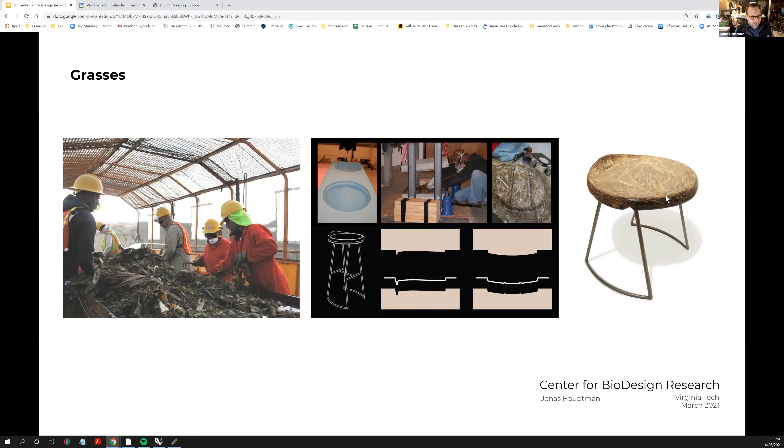I forget the year now, but I was researching palm foliage in the LA waste system, and I developed this stool. And when I started teaching at Virginia Tech, I came back to this project, which I've done with many of my interests, whether it's folding or computation or materiality throughout my career. And I thought, I should think more about grasses. And so that led me back to grasses and then to bamboo.

And so what I came to learn about bamboo, which I find quite important and quite fascinating, is that bamboo is largely an agricultural product. It's not to say that it doesn't grow in the wild in a forest, but when it's used as an industrial material, it should absolutely be farmed, and it commonly is farmed. And so that gives us a unique position to have a forest product that actually can be farmed in a responsible way.

Part of what makes it so easy to be responsible is it uses not a whole lot of water, doesn't need lots of pesticides, and also it's rhizomatic, meaning that it generates new growth from the same root structure. If you clip 1/3 of the poles every year after the grove is reasonably mature, it continues to regenerate, and most species will regenerate for 60 to 100 years. This is a really unique part about this plant that's not true about trees.

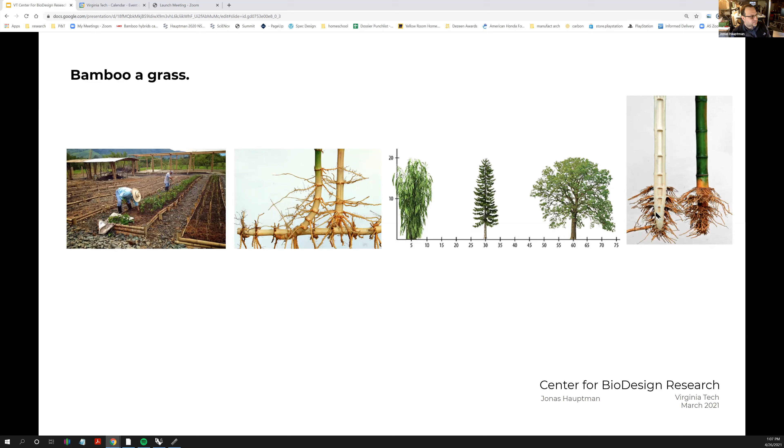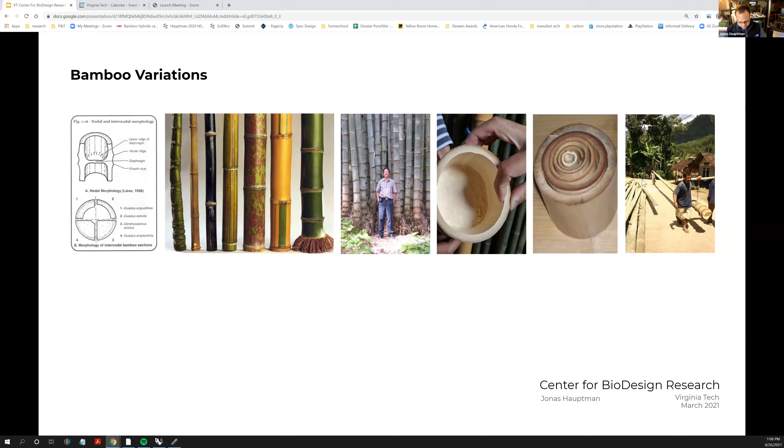So although I teach mostly industrial design, my interest is, I think, pretty squarely positioned between architecture and industrial design. And I think in the areas of biomaterials, often industrial design, which has less constraints, is a pretty fertile ground to look for early folks developing interesting ideas.

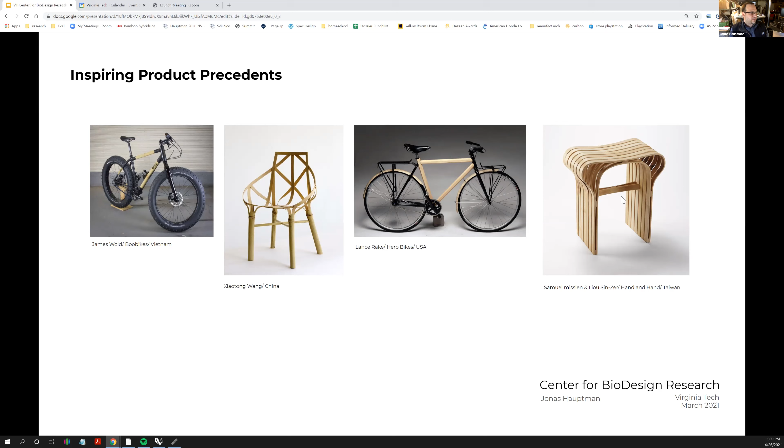Or Lance Rake's ingenious ways to take craft histories of things like barrel making and incorporate bamboo as a material system. Or this collaboration between an artisan and a designer using the kinds of processes used in making things like baskets that you might boil a dumpling in. So I think in design, there's been a really interesting use of bamboo already. Of course, there's always room for more.

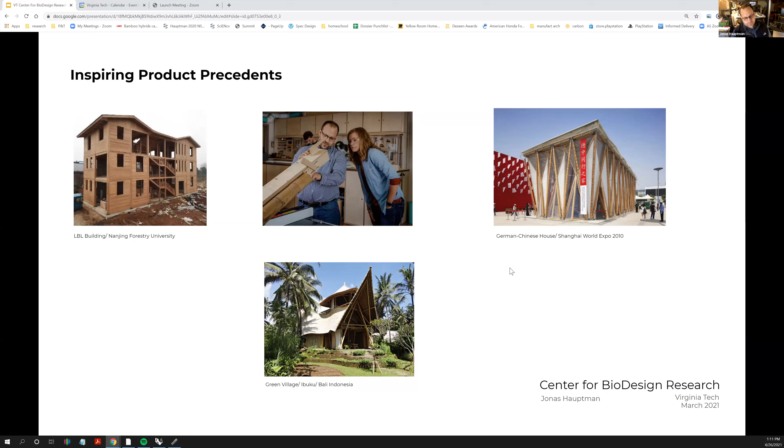So it's also important with bamboo to know that largely, unlike lumber products and other forest products, it's still worked in a way that's almost pre-industrial revolution. So often the carpenter is the farmer. The carpenter goes to the field, might care for the poles, but certainly is the one selecting and picking the poles and curing them and drying them and so on. And so because we're in Virginia, not in Vietnam, we didn't do any of those steps, but we sort of paid a penance for that.

And so I wanted to describe our process, which is I went to Vietnam. I met with James Wold. I learned quite a bit about this species called Dendrocalamus strictus, and observed his process. So they select poles, they heat them over a fire to straighten them because they grow bent when they're a clumping species like the one we're speaking about. Then they're soaked in a tank of boric acid, which is basically detergent, at a high temperature to drive the sugar out of the bamboo for 48 hours.

And then they're dried in the sun, often for a month or more, depending on whether it's the rainy season or not. And then in our case, they packed them into a container. That was wonderful. We wound up with this huge lot of bamboo to experiment with, but it came at a certain price too. University labs are not accustomed to container deliveries, for example. Also, I had no idea how much mold could grow in roughly 20 days at sea. Literally, it rains in the container. So it showed up to our lab. We have very strict health requirements in the United States.

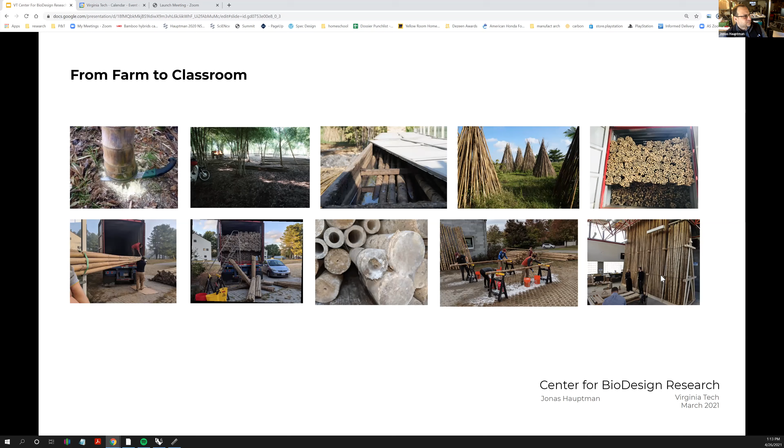But the other important thing is we got to know the bamboo in a new way, touching the material, building tacit knowledge, not just for how to work with it, but literally what it is, what is its form. And then finally, we began to work with it in the lab. You know, bamboo is able to be unitized as a commodity, but it is not unitized like lumber. Every piece is different. So you really can't stack it the same way. You can't describe it with the same precision in a static way.

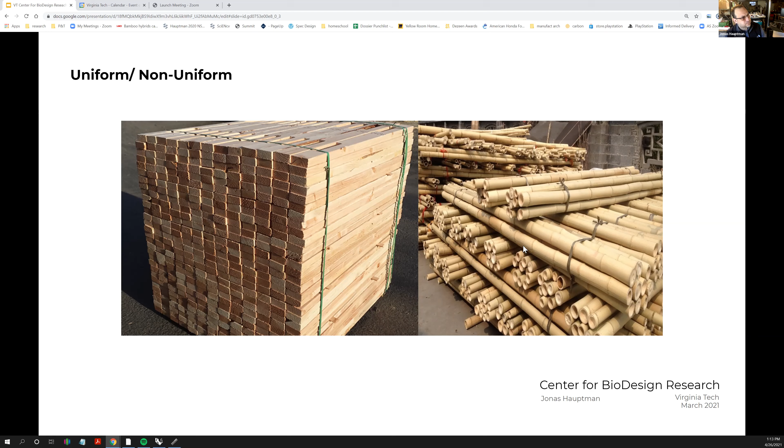So we've started to build some machines to process bamboo, to experiment with the intersection of technology and biology, and to develop machines that would allow someone less skilled as an artisan to work bamboo precisely, and also perhaps tools that might mediate between a designer's intent and a maker's ability.

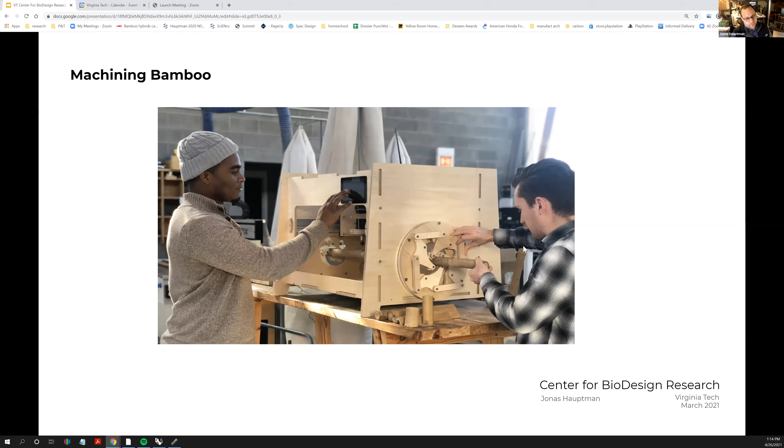And I took this one to Vietnam and tested it to think, oh, maybe it will work to do some kind of manufacturing. It turned out it was a very good conversation piece for James and I to talk about, but it wasn't really quite productive in the way that we might have hoped. And that led us to kind of continue thinking about what to do next.

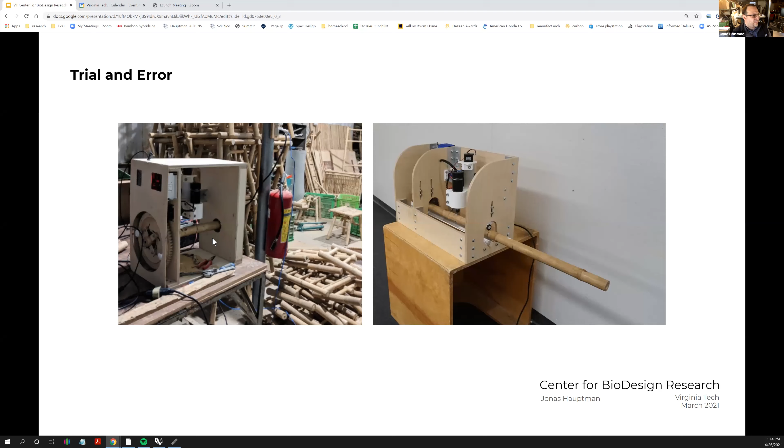And so a couple of years later now, we finally have a modestly working machine, still could use lots of improvements. And the goal is to develop an open source project that we would share the designs with freely around the world, and that can be produced with simple tools and basic computer skills for under $1,000. And so I think that will be ready to release within a few more months. And it builds upon the work of many others, not so much with bamboo, but the DIY community that's been building machines largely in the last 10 years, but in some ways for the last 25 years.

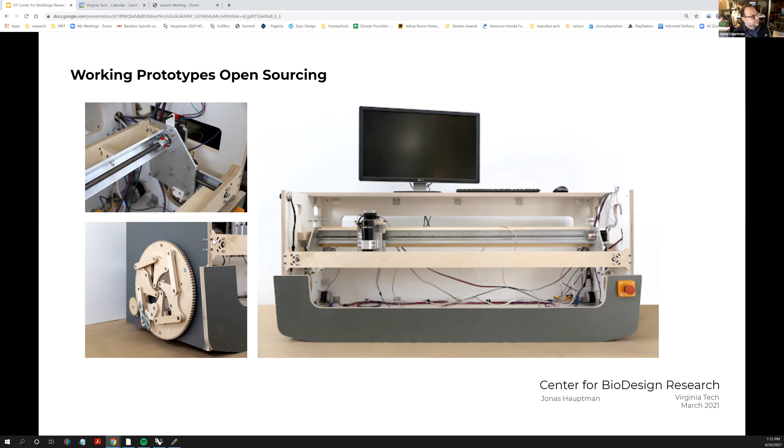So the whole reason we would do this is we're trying to rethink the way you think about materials. So, you know, historically, we thought about standard materials in the last 25 years that were flat rectangles. How could you reprocess a flat rectangle to build a new kind of product or a new kind of architecture that had more expression and still had an economy of production? So these new materials, they require a different kind of thinking.

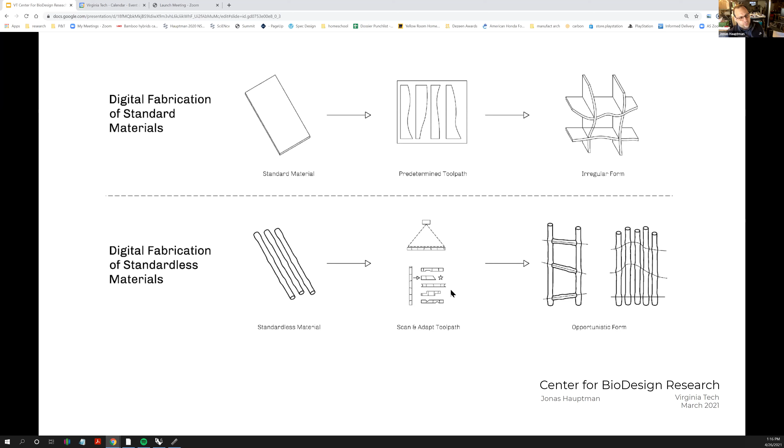And so perhaps you have to be more collaborative with the material, but also to know it, we've been developing methods to scan it, to actually build models of every pole. So we want to know each piece in a precise way in order to use it to its fullest potential. We've also been playing around with some other ideas.

And we've also recently learned that what we thought was called Dendrocalamus strictus, iron bamboo, may in fact be Thyrsostachys siamensis. And so these species can be misidentified. It's another challenge for bamboo, that to grade it and identify it is quite hard. And actually the person who sold us the material, James Wolfe, is considered a world expert, and he's actually not sure which species it is now.

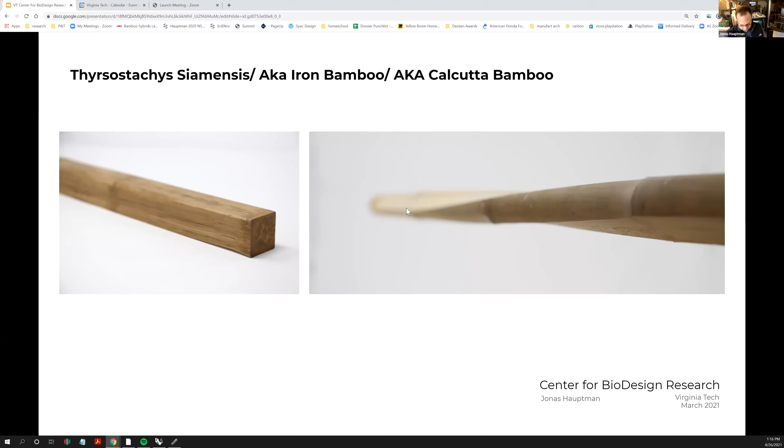So this project, we largely are trying to rethink the way the vernacular of bamboo works. Can you see it as a woody, solid thing, not as a hollow tube? Can you avoid what we would call the Gilligan's Island kind of tiki vernacular that it's so often associated with? Not an indigenous hut, but a kind of a contemporary building system.

And to do that, we thought, how could we begin to make some planarity out of these things, turn them more into rectangles than organic shapes? And how would that affect its performance? And so, looking at the histories of wood and of bamboo, wood is commonly turned into boards, but it's big enough that you just lose the whole outside. It doesn't really matter. It's sort of reasonable to do that.

Or bamboo, often it's used whole or it's flat, but really trying to salvage every bit of its potential just in a flat shape, which largely loses its structural potential. So we thought, what if we could do something in between or something a bit different? And so we worked on developing some methods to turn it into small boards. And so the biggest question we had was, would it still have mechanical benefit? Would it still be reliable and strong?

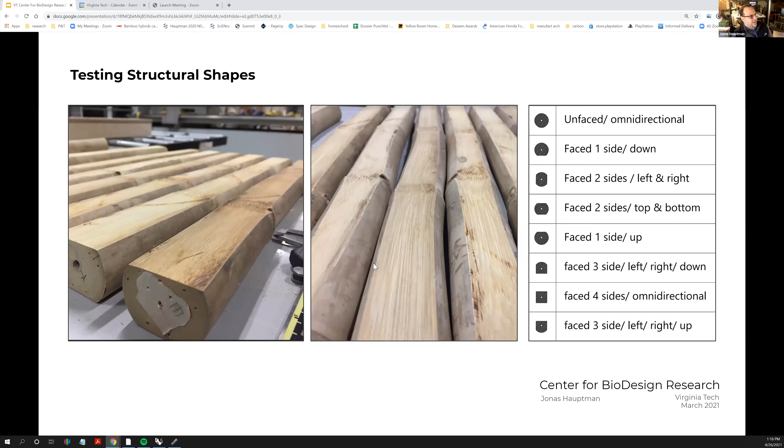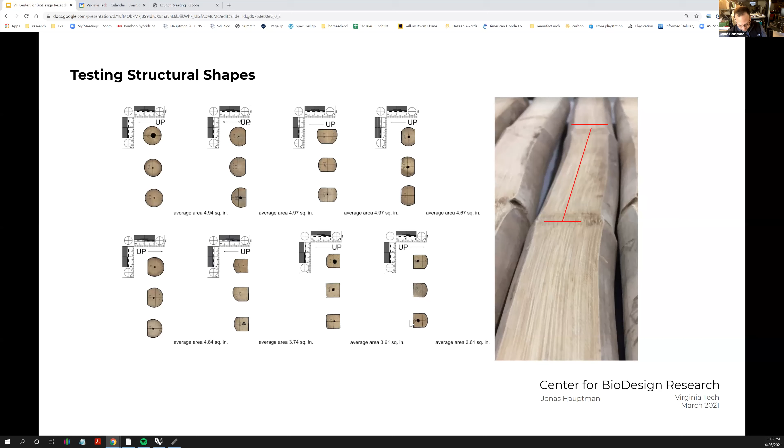And so basically we developed a series of different permutations for shape and for how we might bend pieces. We made a small sample set, 3 of each, not a whole lot. And then we also tried to look at area and figure out where's the biggest area, the smallest area, and can we try to make those as average as possible so that when we break these things, we'll have the most evidence that they're similar. And so we did tension, hardness, and bending testing on this material.

And what turns out is that, in the United States, a 2x4 is a very common building system. It's called spruce SPF2, spruce pine or fir 2 is how you would call a 2x4. And so there's a lot of literature on the common strength of a 2x4 for bending. And so we compared first 2x4s to bamboo poles.

And it turns out that in the round, as well as with one side cut onto it, until you get down to much smaller areas and at least 3 cuts, the bamboo is still stronger than a 2x4 and doesn't lose a whole lot of strength either, as long as the area, the section, the height, and the width stays somewhat constant.

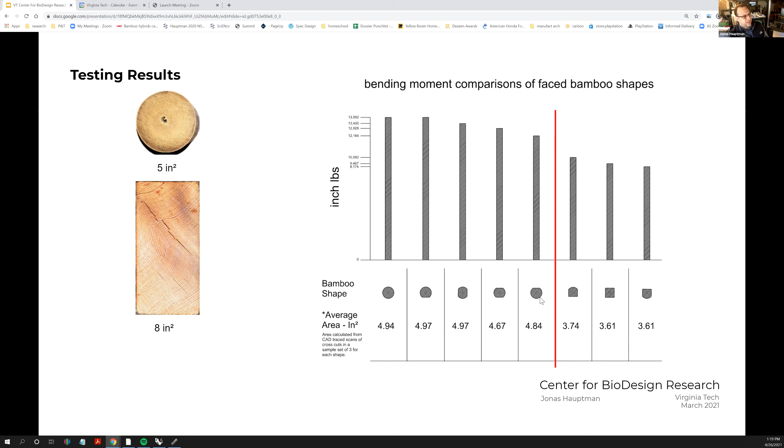And now is a good time if there are any questions, I'll stop for a second. Are there any questions yet? Yes, we have 3 questions here on the Zoom chat, but do you want me to ask them now or at the end? If they seem appropriate, either way is fine. I'm happy to answer 1 or 2 now if it makes sense.

Okay. Well, we have one from a student that says, that elasticity that bamboo has is what architecture tries to mimic with skyscrapers so they can react to earth movements and wind, right? It's true. Yeah, bamboo is incredibly good seismically, and there's some work I'll show towards the end from Colombia that at the scale of 2-story housing, it's been shown to be far better than concrete. And I actually believe there was some work done on a shake table in Guate in collaboration, I think with an El Salvadorian group using this method. I don't know where in Guate it was done, but yes, bamboo seems to have very good properties this way.

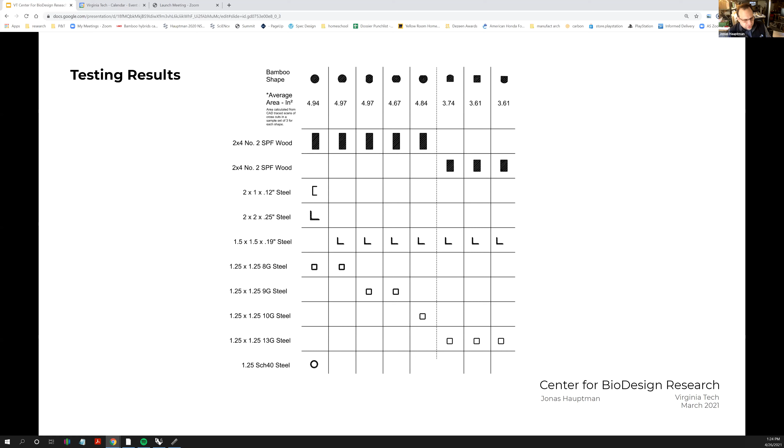So just to show you a little bit more about how this species grows, it's really quite interesting. You think of bamboo as a hollow structure, and of course it is, but this species is quite woody. And so we did a lot of work trying to understand this so that we could develop geometries that would use this characteristic. If we want it to stay woody looking, then we don't want to hit the middle of the pole when we machine it, for example. Other times we might choose to expose that, but then we have to think, where in the pole would we do that? The nodes are always in different places, the wall thicknesses change, and so on.

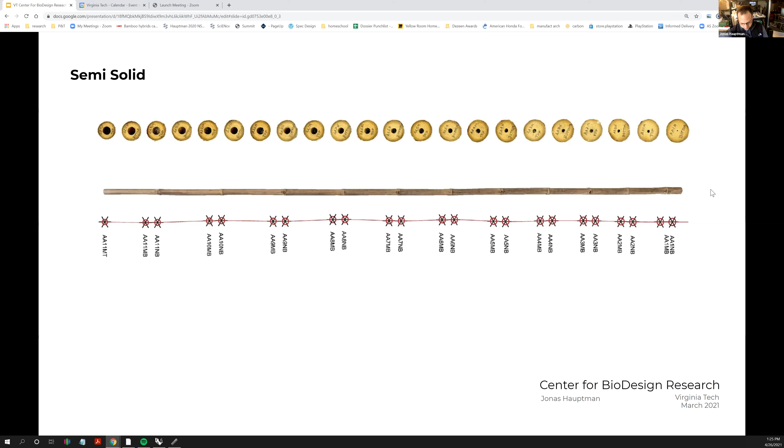So our real goal of this project was to develop a library of joints, and then to develop a generative logic that would allow a compromise between the actual bamboo that we would understand through scanning, a catalog of parts, a desired form, and then we would essentially compromise to what the biology was asking for and what tools and machines we could develop.

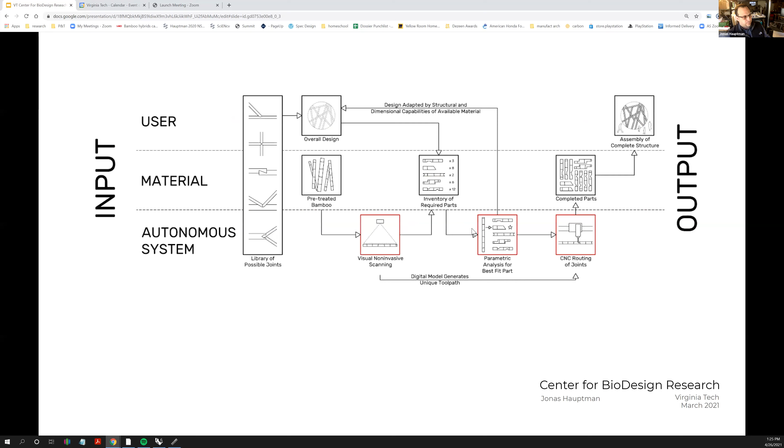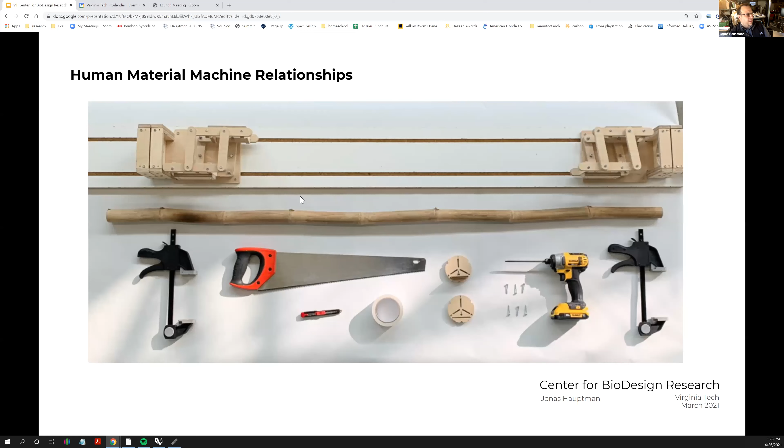So these tools and machines were developed in two ways. One was the CNC we've developed. The other, so that we could start working immediately on the bamboo itself, was to develop methods on a more conventional machine to also machine bamboo. So the fixture you see in this image finds a theoretic center of the pole, allows us to cut the pole, and then attach these little end pieces that allow us to index the bamboo for future processing, which I'll show next.

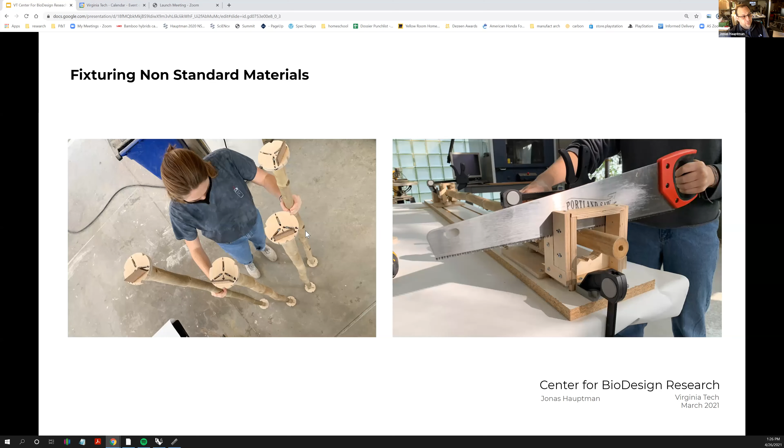And so every step requires its own little tool or fixture. Some of these we're inventing, some of these are really the products of histories from woodworking, others from metalworking and machining. And so in this case, now we're able to 4-axis machine bamboo. On a 3-axis machine, we rotate the bamboo and use an angle gauge to define what position to machine in, so you can machine multiple positions on a single pole.

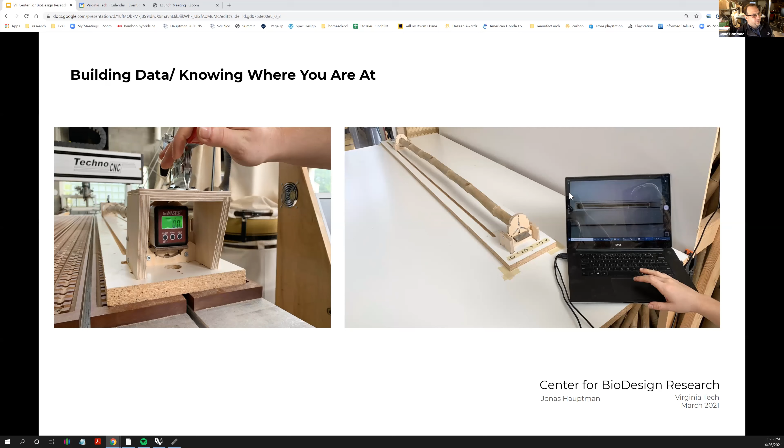And then we're also using photography to take photographs of poles that get turned into scans using Grasshopper. So we basically edge find the bamboo in the images, and then we turn that into a swept surface. And then therefore we have a reasonably accurate model of the pole as it actually is, not as we imagine it to be.

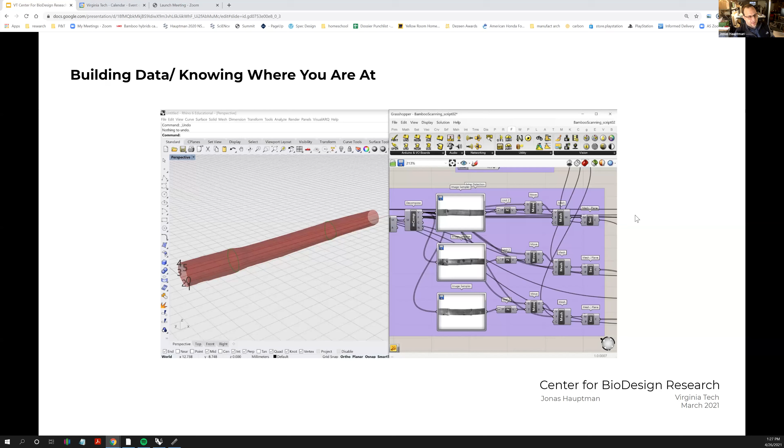And so then we spent a lot of time just learning how to machine bamboo, and I'm not an expert machinist, and I'm certainly not an expert bamboo artisan either. And so many of these things, others might say were so obvious, but to us, we're learning as we go, and we've gotten quite a bit better at it, but it's taken a lot of trial and error, breaking lots of cutters and lots of bamboo.

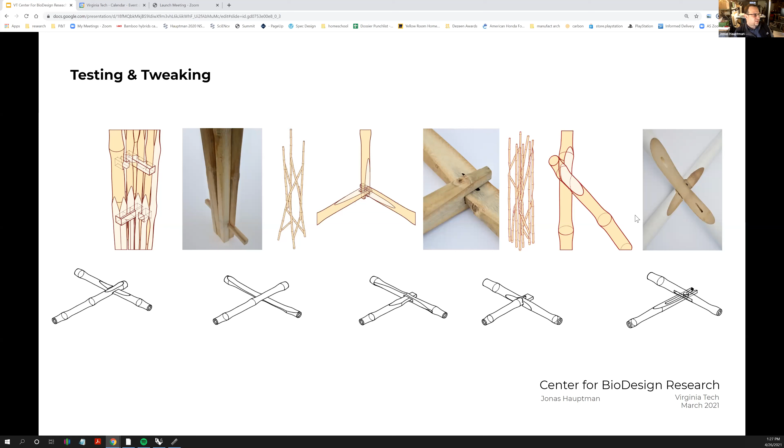And so some of the work explored earlier was really just trying to understand vernacular potential. So how could we change the vernacular qualities of the bamboo by finishing it differently, by carving into it in new ways? And so we developed some kind of sketch models at full scale, little mock-ups of different kinds of conceptual joints. Some were really joints, some really weren't joints, and they were just kind of intersections of sorts.

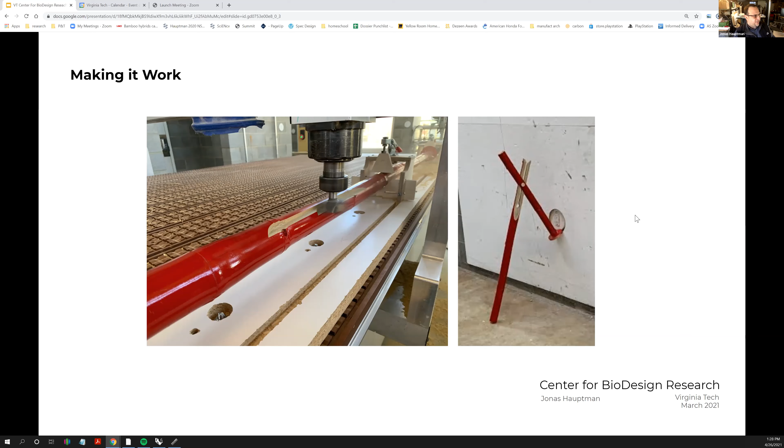And then finally, after about 1.5 years, we figured out how to machine it reasonably well, and decided to also play around with finishes that would, in a way, protect it, but more importantly, create this artificial skin so that when we expose the inside of the pole, you might have more expression. We made a few small structures. We've made one, and we're currently working on 3 or 4 others that we have planned.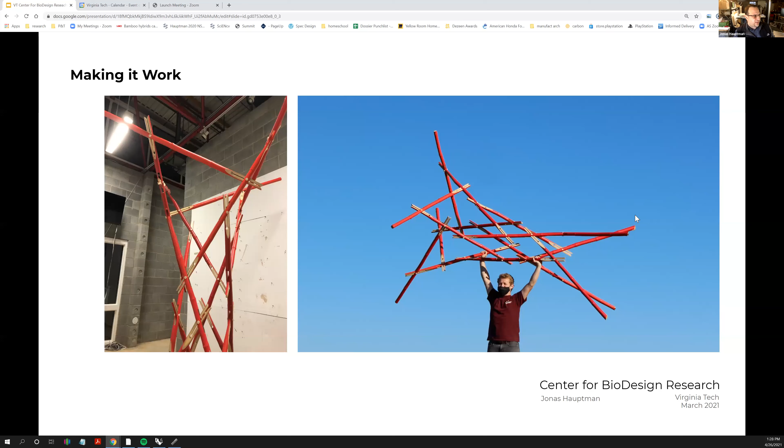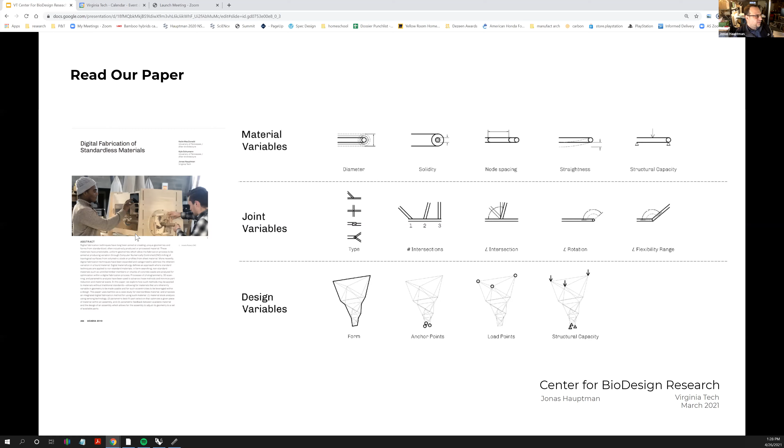If you're interested more in this work, you can look up an Acadia paper that I co-authored with my collaborators, Katie McDonald and Kyle Schumann, that talks all about kind of standardless materials.

So the next project I'm going to share is the one I'm, to be honest, most excited about today, which is the development of what we call smart cross-laminated bamboo. We would call it maybe a little brother or cousin to cross-laminated timber, and also a bit like a SIP panel, which is a building system used in the United States to make really well insulated, lightweight buildings that tilt up with very few parts. And we're also currently investigating how the system will compare to concrete block. So our life cycle assessment is comparing CMU to SCLB.

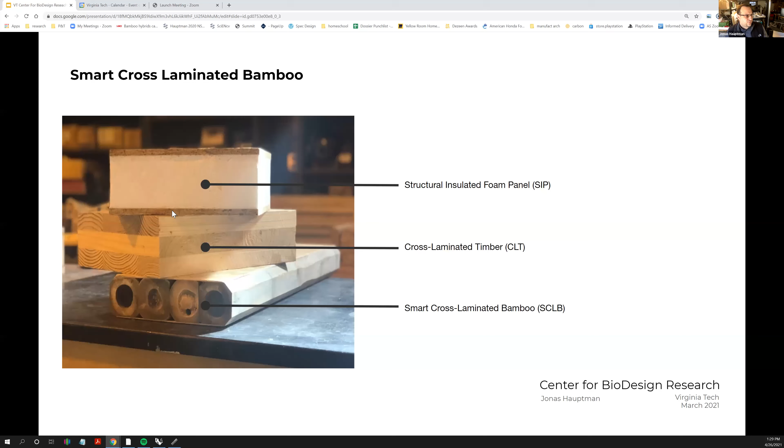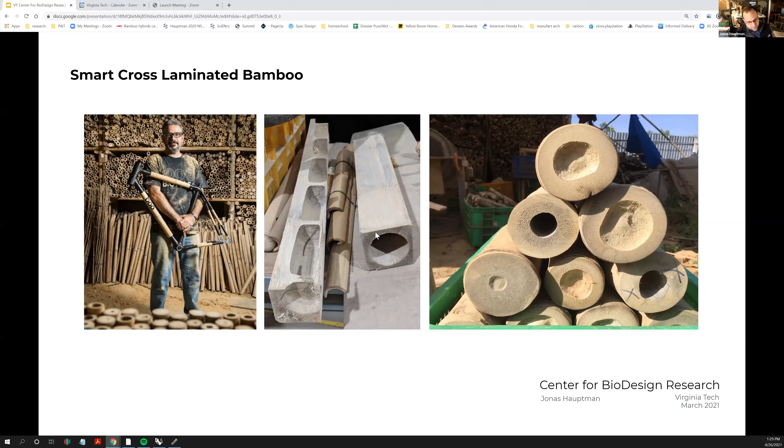So again, this was largely inspired by my trip to Vietnam, working with James, looking at this species that they call Tre Gai in Vietnam, and beginning to understand that even the hollow species in Vietnam that are tropical can be quite woody. And so how could you leverage that woodiness in yet another way? And so the concept we came up with, Katie, Kyle, myself, and Dan Hindman, who's an engineer here at Tech in Forest Products, was could we turn this line into a plane? Could we build structural potential that would extend what a bamboo grass or stalk would be as a panel or a wall?

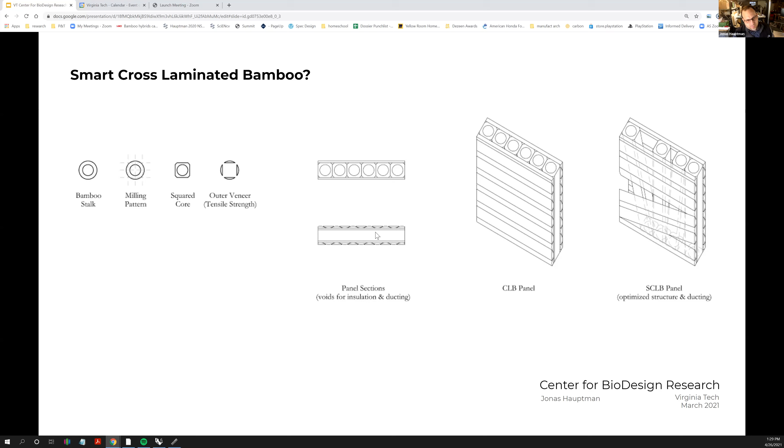So just to give some historical connection. This is work from Latin America mostly. This is actually Europe, but basically some of this idea of making a kind of rigid panel has been part of architecture in Colombia for around 100 years. Only it's a site-built system, and it's limited to 2 stories. And the bamboo is not necessarily perfectly well known. So it has its limitations.

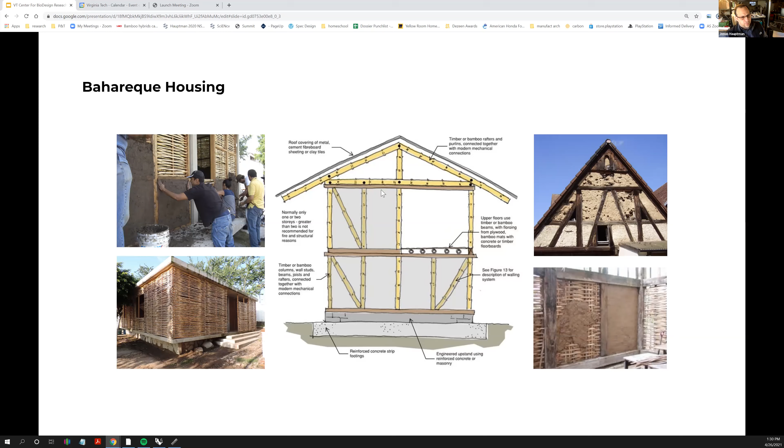But to be honest, when we started, I didn't even know about this process. But I think it has quite a bit of similarity to what we're trying to do, which is to basically take this incredible property and then extend it as a plane. So we began by thinking about how we might break up bamboo poles to make them into planes. Do we leave them whole? Do we cut them in half? Do we use 1.5 poles or 2 poles in the system?

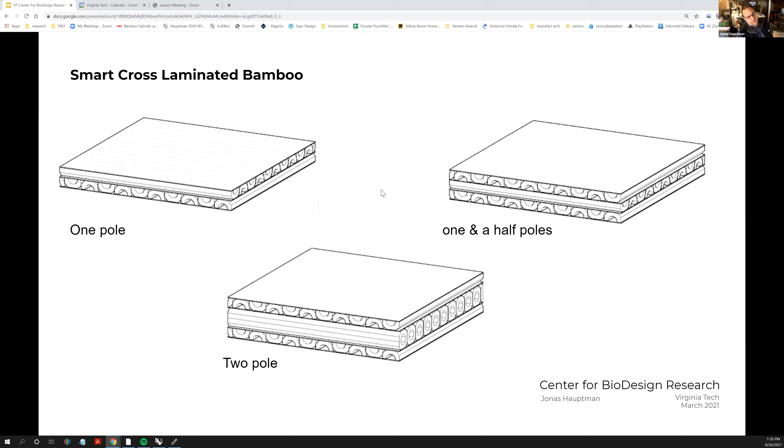Do we use one species or two species? And then how do we imagine bamboo poles could map into a panel and be graded? The different elements might need to be in different places. And the image on the right, it was my guess of what would make the strongest panel. It turns out I was wrong.

My guess was quite wrong about what the best method would be to make the strongest panel to resist bending and failure. But the notion that you would grade the panel with parts that would be placed in just the right spot, so that instead of using a factor of safety based on the weakest piece, you wouldn't have to do that if you could put the right piece in the right place.

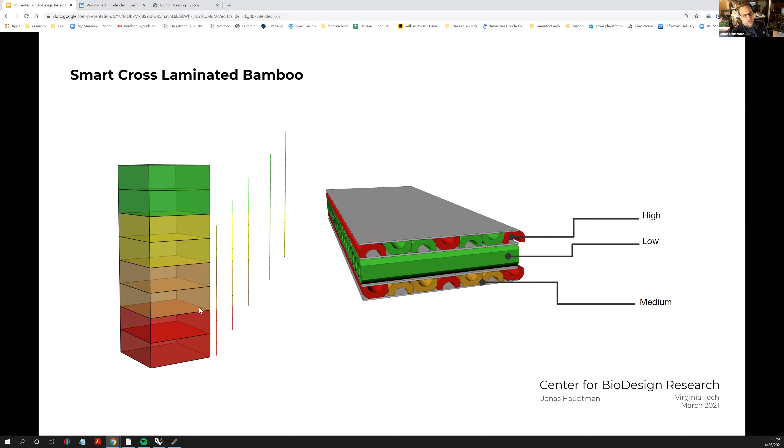Furthermore, could you somehow map that same kind of generative intelligence to the building itself? So could the bamboo pole, as it's standing in the field, as you cut it, could you decide where in the building it wants to live to fully express its mechanical structural potential?

So to begin with, we just had to figure out how to fabricate these poles. And so lots of different fixtures and tools and machines were explored to figure out how to machine bamboo into a flat board when it's anything but flat to start with. And you're trying to remove as little material as possible, but come to sections of wall that might have common thicknesses.

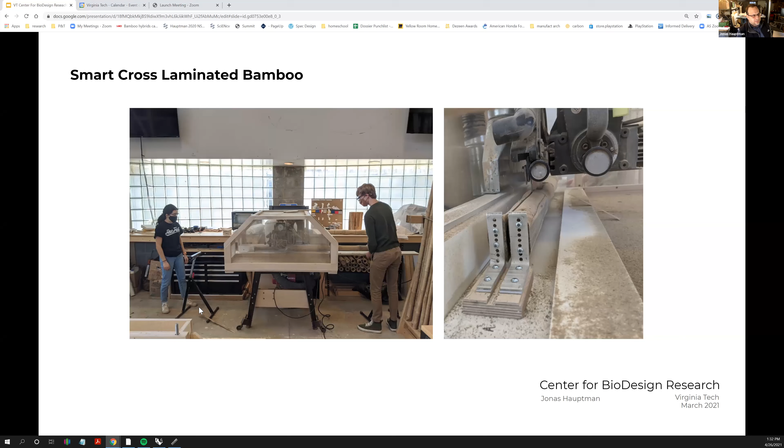So if you had a building, you probably wouldn't have every story with the same thickness of wall. Maybe for floors, you wouldn't either. A public floor might have a thicker floor than a private floor, for example. But we'd have to at least get to a point where we could make pieces of a few different thicknesses out of what is largely completely random material.

We also wanted to democratize the way this could be done. So instead of needing a big factory, we developed methods and fixtures for gluing that would require very little expense. You wouldn't need a big industrial press. You would need a flat table and some threaded rod and a few nuts.

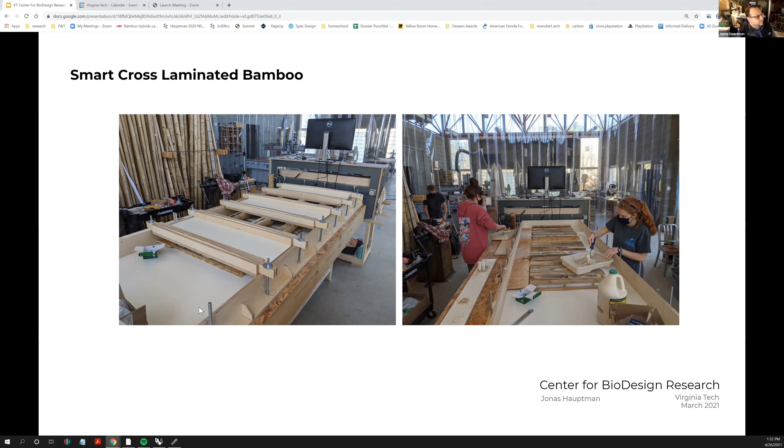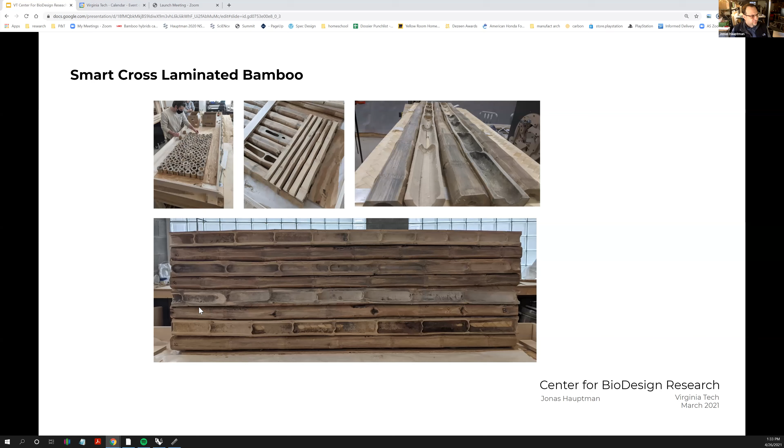And so we developed a series of panel tests of different permutations, experimenting slightly with grading of the different elements, and also different taxonomic relationships between skins and poles and half poles and poles turned on end or on angles and so on. And so here's just a couple examples of how we did that in different ways.

And then here's a chance for somebody to give their opinion. So I already mentioned that this was not the strongest panel, but of these three, which one was the strongest? Does somebody want to take a guess? Anybody make a guess or not? Left, they say. Maybe the middle one. We have the three options. Yeah, so it's not the left one. So is it the middle or the right?

Middle, I think. Middle. Okay. So why is it the middle? It conserved the shape, the roundness of the bamboo. Exactly. And there's another reason why too. Is there an engineer here by any chance? No engineers?

All right. So the one on the left, I expected to be the strongest, but we used a woven inner layer to help spread the glue. And there's a quality of bamboo called rolling shear, which not all materials experience when they're bent, but bamboo pretty easily goes into rolling shear.

And so even though in this panel you have long grain glued together as far apart as possible, which in theory in other stress skin systems would make the strongest result, what happens is the mat in the middle slides and all three layers bend together, but they don't bend as one. So what happens in this one is exactly the same. The parts go into rolling shear, and you can see how this mat is wiggling in the panel when it's being bent, and then it flattens out when you take the stresses off.

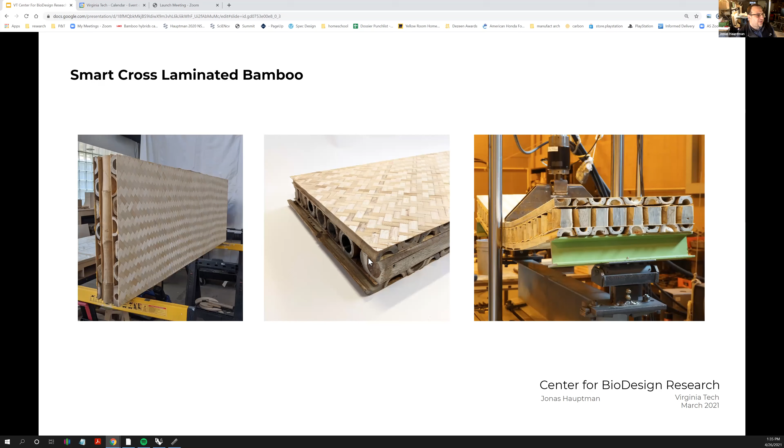None of them broke. I mean, they all failed a little bit, but none of them catastrophically snapped in half. They all basically sprung back about 90% or more after the press was let off of them. But this one took twice as much to break, and I'll show you those numbers in a minute. We also added a few more tests to the mix. This one with no skins, as well as this one where we had the poles straight.

And so we entered in, we took out the mats and we added in a second species. So now we're using iron bamboo and Tre Gai in the same panel. And in this panel here, where this one popped off under enough load, these were on a 45-degree angle. The ones in the top were on the opposing 45-degree angle.

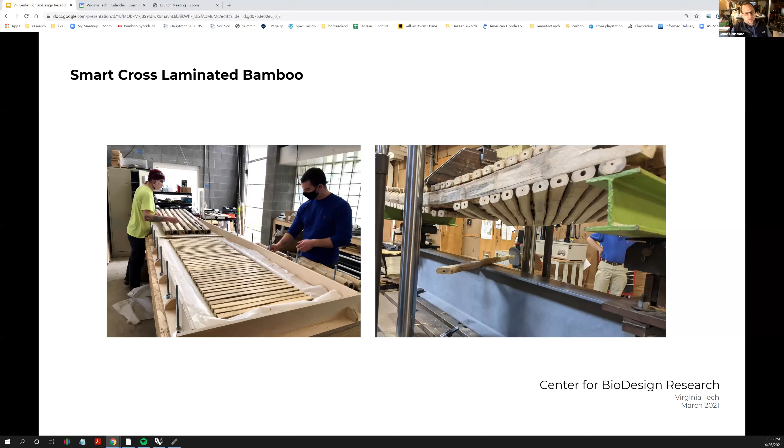And by the way, the reason these popped off was not mostly that the bending stresses caused it. It's because the students did a really poor job gluing. We had not defined a clear enough method for gluing yet. And so some of them actually fell off just by picking the panel up off the table when it was glued. So we knew they were going to fail. But what happened is these ones on a 45 acted a bit like an outside skin and held the middle of the panel together. So here's the results of these five panels in their bending tests.

So the one with the 45 elements is the purple one. The blue one is the one that I asked on the first slide, which one was the strongest. And so in bending, these two outperformed all of them by a significant amount, and they doubled the first three. The blue one doubled the strength just by changing direction.

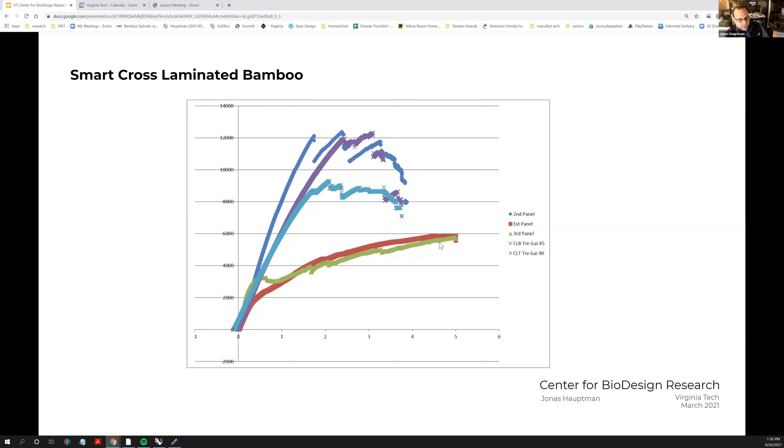So this is not necessarily a slam dunk, an absolute fact yet, but what it's leading me to believe is that if you preserve the biological intelligence in the most obvious way, which is to leave the whole pole as whole as you can, run it the longest way through the panel, that has some benefit of doubling the strength of the same material organized another way.

So we've also been playing around with growing and with plants and with fungus, and in many ways, some of these things are just early opportunities to have design students touching growth, even though we know this probably won't be particularly useful as a technology. So we took bamboo plants, we stuck them in these little fixtures, and we grew them at different angles to see if we could influence the growth, the longitudinal section. Could we basically program the growth of a line?

And we're not the first ones to do this. Brian Erickson, who's a bamboo enthusiast in Costa Rica, and Oscar Lopez in Colombia, both did something similar, but they didn't do it with moving the plants. They just pulled on the pole. They used mechanical forces to train the plant. And we thought, well, that's really cool, but you don't have that much control that way. What if we could just use the orientation of the sun to control it?

And it definitely worked. But then as we learned more about bamboo, we learned that the rhizome requires not just one shoot to be growing at a time, but 2 or 3, because the plant from the year before is what actually feeds the new plant. So it might work in a lab, but it would never work at scale. But what it did was it got us thinking about, oh, we really need to know more about growing the bamboo as part of our process.

We've also been working with some folks from UC San Diego, a biologist named Stephen Mayfield, and a few chemists that he works with, at using algae oil, polyurethanes made from algae oil, as an adhesive system. If we're trying to make a green product, using petroleum-based glues seems like not the best idea. However, currently there aren't a whole lot of other options.

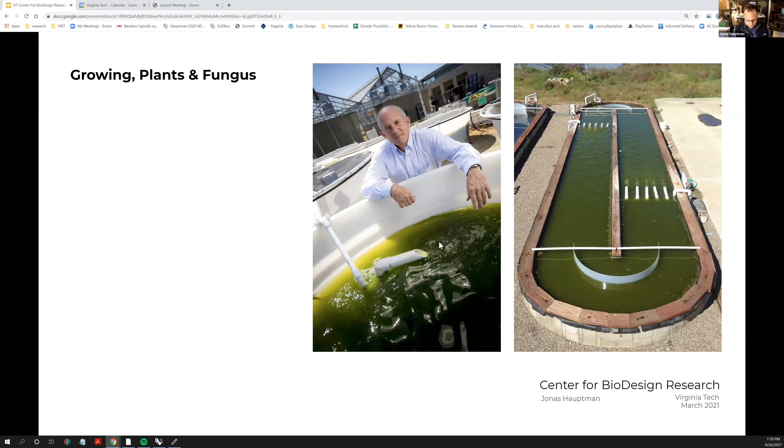So we've been testing these glues to see if they perform, and they perform just as well as the other glues we've used. Actually, they've performed slightly better. They have a little bit better elongation than the other glues we've used. And so on a purely mechanical level, we could make the shift.

These glues are not fire rated yet. There's plenty of issues we still have to work out, but we're encouraged to think that we might be able to use these glues as a replacement. And although they're not made from petroleum, they're still a heavily processed chemical. So maybe it's still not the perfect solution, but it may be better than anything else we had yet.

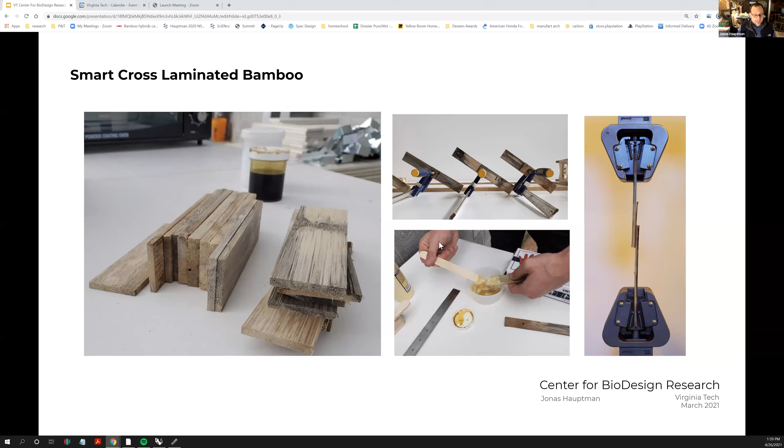And so we're also trying to develop some further investigations. I've recruited a mushroom farmer. He was an art student in undergraduate school and became a mushroom farmer, an amateur mycologist, and I recruited him to graduate school in our program. We're studying if we could use the roots of mushrooms, mycelium, which is already a known building material in a mild way, in a packaging material. Could we use it as a way to assemble a panel?

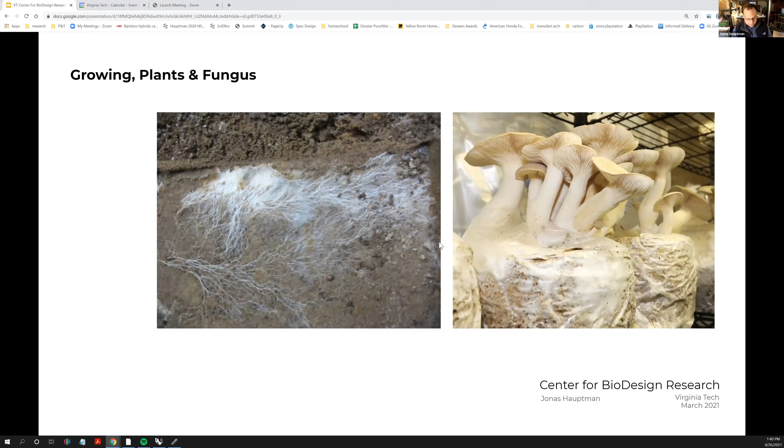So we haven't done a whole lot of work yet, but we've begun to do a little bit of experimentation with trying to just composite bamboo particles and sawdust that have been inoculated with oyster mushroom mycelium and reishi mushroom mycelium to develop kind of composite panels.

And so our long-term goal is to try to make a fully grown system, whatever that might mean. At this point, it's still just a metaphor, but in many ways the goal of our lab is to really, everywhere you can, leverage biology, whether that's by literally using biology or by using biology as inspiration. We think in both cases, this is the kind of future of how we might live more symbiotically with the rest of the planet.

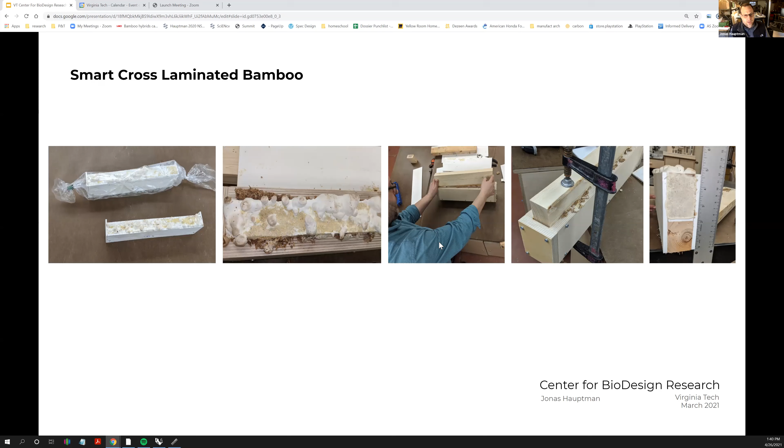This summer, we're going to build a ceiling for a dorm building. We're also playing around with lime plaster, some of which we're buying, but some of which we're actually going to make from the quarry dust from a local stone quarry. And then finally, we're beginning to build a kind of prototype out of the CLB system as well.

And then I hope in the next 2 years to be building some kind of building in both Vietnam with James Wolfe and in Guatemala with Alfredo and Roberto. We hope to be making small, temporary housing prototypes, to begin to understand how these ideas might work. And we're also going to have to shift species. I'm sure we'll use Guadua mainly if we work in Guatemala. So some of the assumptions about solidity will have to be questioned and re-examined, and we're currently beginning to do that work now.

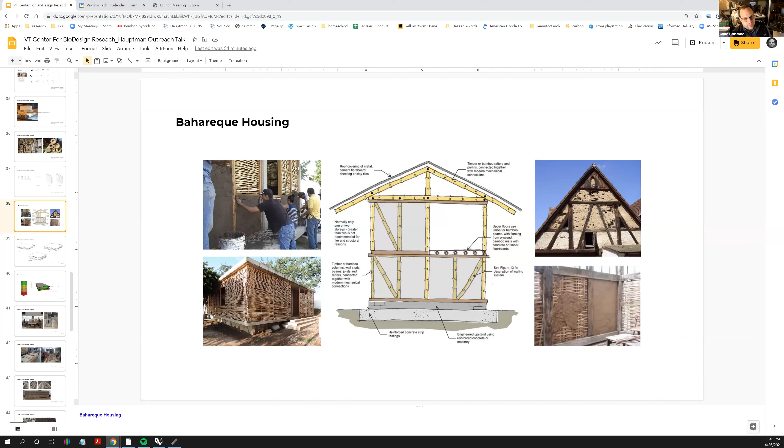And these are great questions, and that's the call we make to everyone else: don't ask us, tell us, let's start doing it, right? Yeah. Well, thank you.